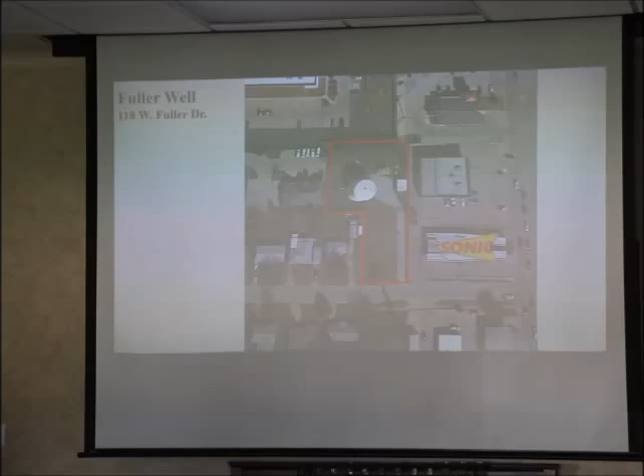Now it's interesting, we haven't heard it here because we're Trinity River Authority, but there's been a lot of articles in Arlington where people are complaining about taste and odor. It's seasonal algae blooms, and again it's not a health issue, just a taste and odor deal - it's water out of Lake Arlington. You'd say, well, we get our water out of Lake Arlington too from TRA, how come we're not having the same thing? TRA has got all this advanced treatment that y'all have seen through the plant. Arlington has that at one of their treatment plants, but not the other, and the one that has it is right now closed for a planned renovation, so they're running it through the other one. So this time of year there's been several newspaper articles about it, but even though we're getting from the same source, TRA is doing some additional treatment.

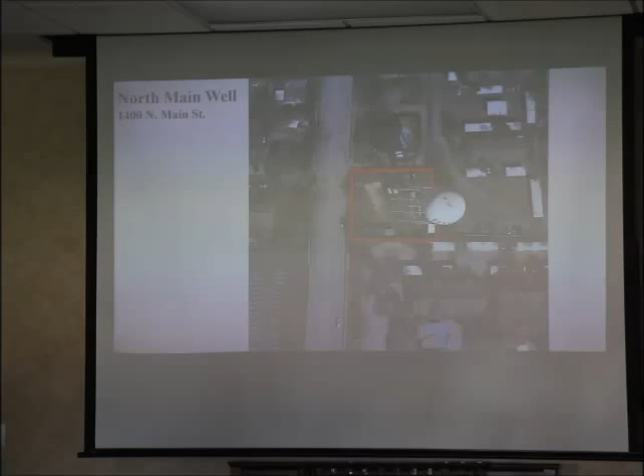Good to know. This next site is just the leg stand site where there's a well and a tower - this is the only site at the north main well. It's kind of obvious, if you can see the picture better it'd be more obvious, that it's just too small of a site to re-drill the well. Now the lucky part for us is that's our best well of the three wells that we have right now.

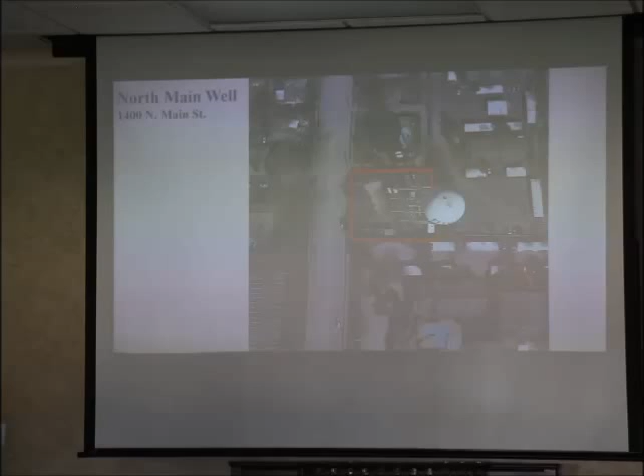It's the most consistent, it's the one that is just in the best shape. So we cannot re-drill it on that property, but it's still 50 plus years old. It's still past the end of life, but of the three, it's the best one.

And then this is that North Main, the far North Main ground storage site. Again, what the report has told us is it is a large enough piece of property to be able to re-drill the well and reuse most of the equipment that is already present there, including that ground storage tank.

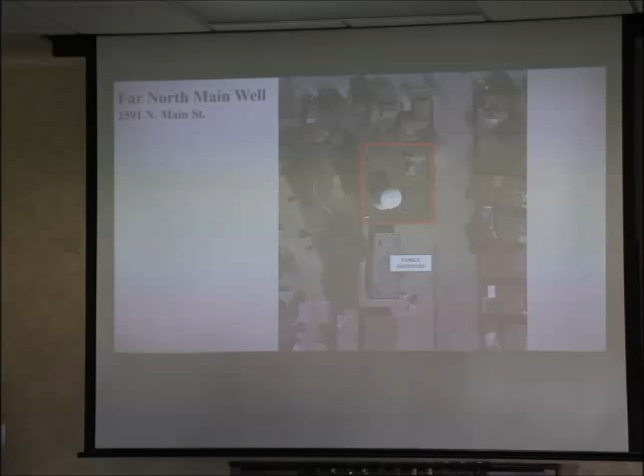This is that North Main water tower, 2 mil. This is the furthest north. What is that court, Bob?

That's Almond Court there, just to the right behind the picture. So Main Street and Cinnamon, the Nut Streets right there. Spice Street, sorry. Nut Streets. Gary Landers used to live in that area, so sometimes the association comes out.

There's no well at this site right now. However, I told you we could not re-drill a well at the leg tank. This would be probably the spot to, when we re-drill a well, move here.

We would have to do some additional testing, including a test well, before you sink the kind of money into a new municipal well. But there is room here to do a test well, and there's some operational efficiency where we can use that well then to fill that tank.

You've noticed at the other well sites, you've either got an elevated storage tank or ground storage tanks. It's part of the operation of the well. So it would be the logical spot to be able to re-drill that third well.

So what did the report tell us? The report told us that it's going to be about $3.5 to $4 million per well site. Wow. All in for a new well.

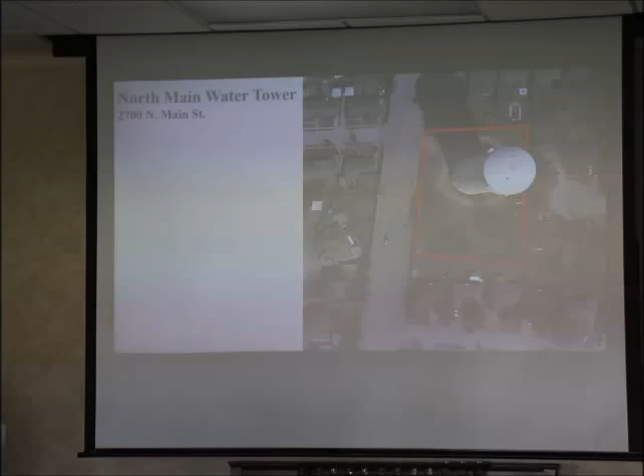Carbon steel is the typical material that is used in wells. It's fine, there's not a problem. Stainless steel is just a better material. It does not get as brittle over time.

The brittle casing can cause what we have now, where the upper aquifer leaks into the casing. If I showed you a down-the-shaft video of our wells, you'd see patches put into that existing casing over the years. It's a swaged patch, somewhat like patching a pair of jeans. The first one's okay, but when I was a kid I had patches on top of patches in my jeans, and at some point our wells are at that point - you just turn them into shorts.

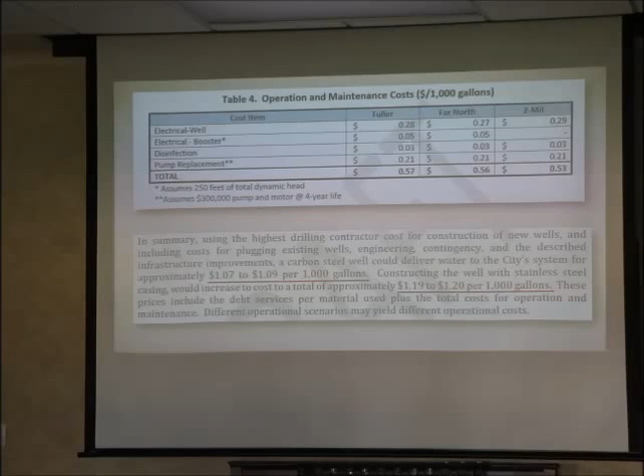This is how they're getting back to, as Loretta said, a comparison to a TRA number. If you look at the electrical, we've assumed - we know what the electrical is, we know our electric rate, at least for the next 5 years because we're locked in. Disinfection, pump replacement - you can see what they factored in there. It all comes down to between 57 and 53 cents per thousand.

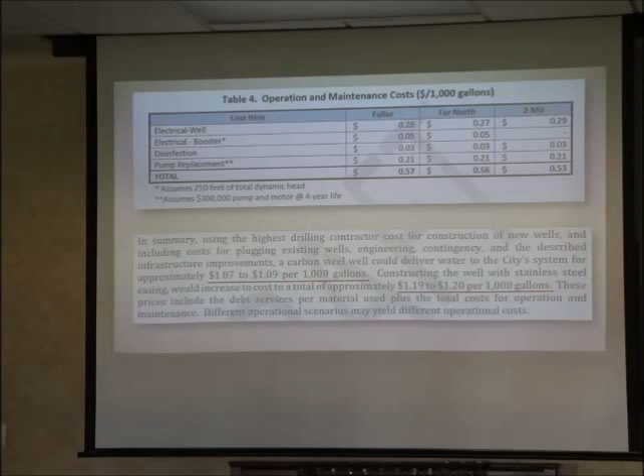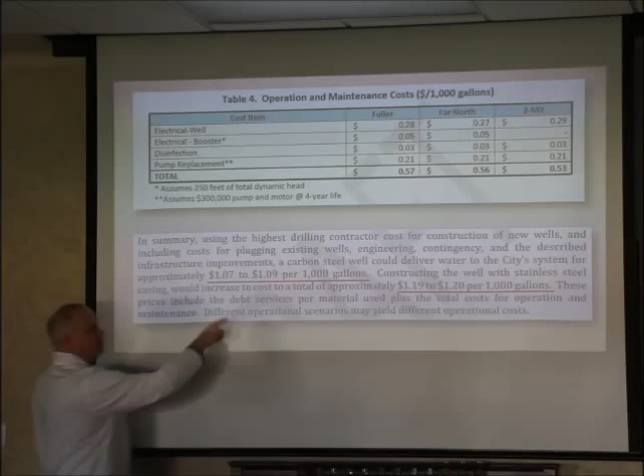So you add that together and get down to this statement: if we're talking carbon steel, $1.07 to $1.09 is the cost per 1,000 gallons, all in. If you go to stainless steel, it's $1.19 to $1.20.

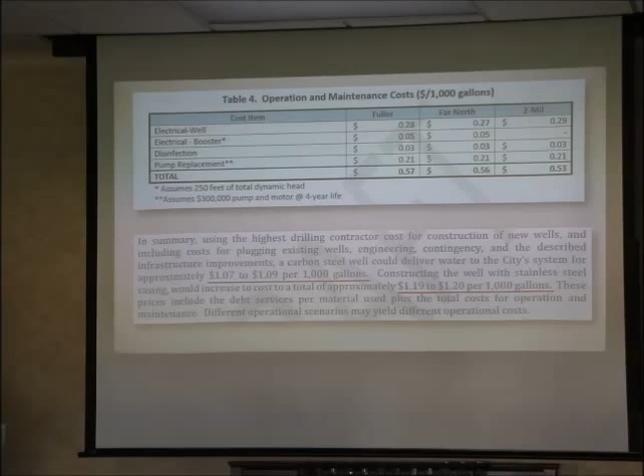The apples to apples comparison is our current rate from TRA, which is $3.27. We also know that our TRA rate is not going down in the foreseeable future. If you look at their projections, it goes up, the electrical cost to get water, raw water treatment. I would not ever tell you to bank on that number going down.

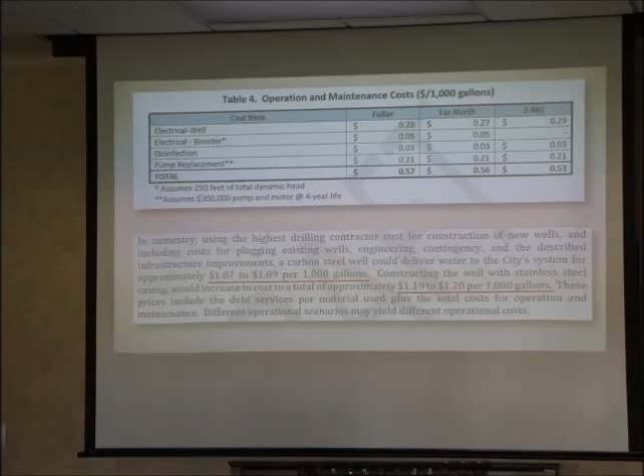So this was really the first decision point from the staff's perspective: do we stay in the well business? Should we just, when the wells die, plug them and go to TRA water? I would tell you we started into this process with some thinking that maybe we should just not have the wells.

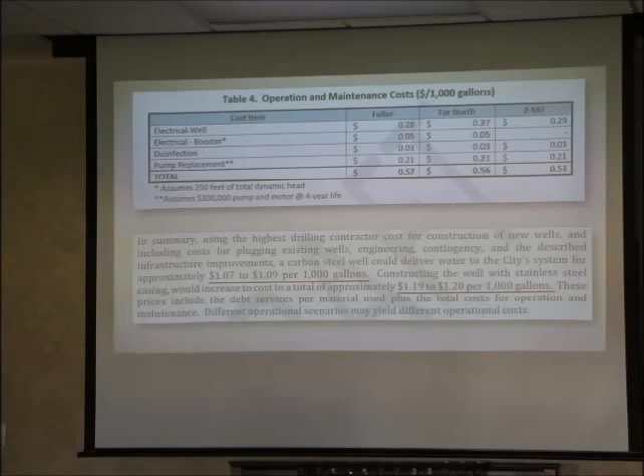But when you look at this, in an optimal situation we would be getting about 1 million gallons per day from each of the wells, Chris. So you've got the potential there. Now, with the wells being up and down the way they've been, we have not been at that optimal production for quite some time.

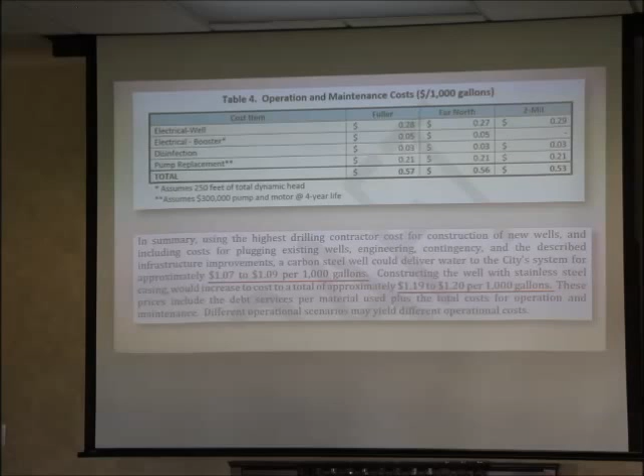So if you're not able to get that water from the well, you've got to go purchase it from TRA. When you do the math on that at $3.27 per 1,000 gallons, we quickly made the decision that the wells continue to make sense from a financial perspective. It's over $2 per 1,000 gallons in savings.

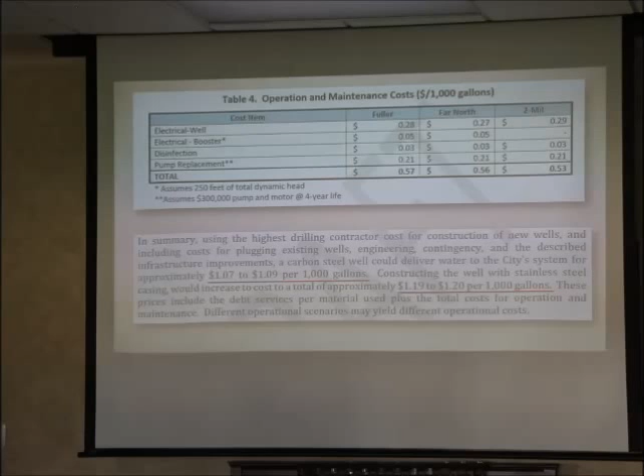And again, if they all quit tomorrow, we'd have to purchase that water at TRA's price. Right now when we do our budget, we count on getting water from the wells at a cheaper cost, and that's factored in. Obviously our customers are not paying separately for well water and TRA water, it's a blended rate. But we're able to keep our overall cost lower because there is some supplement from well water as well.

Well, that's 3 million gallons a day. Is that what you said, 3 million a day? That's optimal. What would that represent of our total consumption? It's a small part, right?

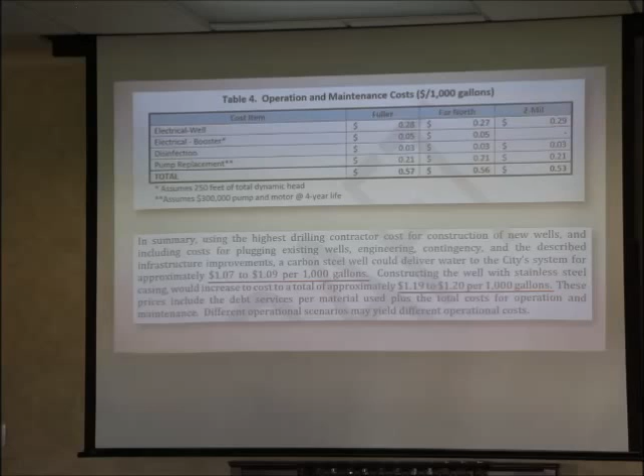We're not getting the 3 million right now. So the way I'd really answer that question is when I go back and look at a given calendar year, we are about 70% TRA, 30% well water.

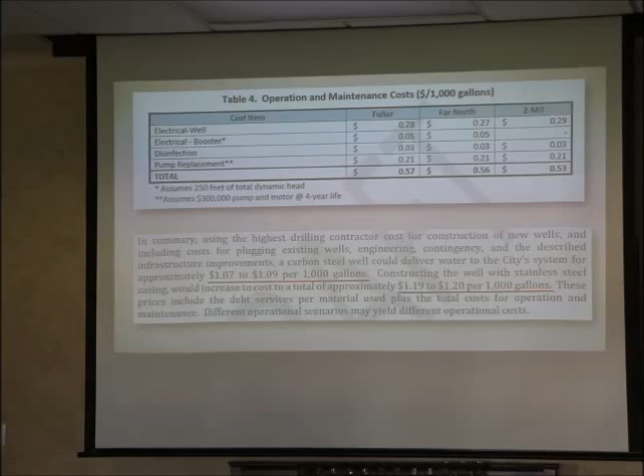This gets into the next part, and you kind of have to follow the train of thought here. We are a member of Trinity River Authority, along with 4 other cities. We have a contractual obligation with them. There is nowhere in that contract that says the city of Euless cannot produce more than X gallons or has to produce Y gallons. It's, I don't like the term gentleman's agreement, but when that cooperative was put together, we all, as individual cities, brought to the table a certain amount of existing water.

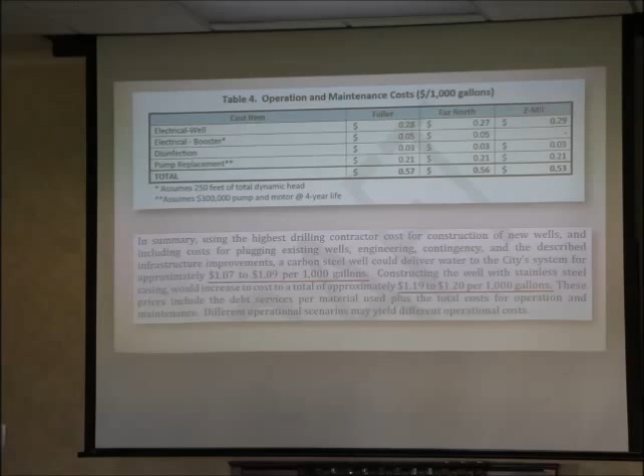And as a cooperative, we've added to TRA and grown the plant over time. So if I went out and drilled wells all over the place because it's a third of the cost of TRA water, the heck with TRA, let's just go do it, that would be to the absolute detriment of TRA and all of our neighboring sister TRA cities. I wouldn't want to do that to them. I don't want Colleyville, Bedford, or Grapevine to do that to us.

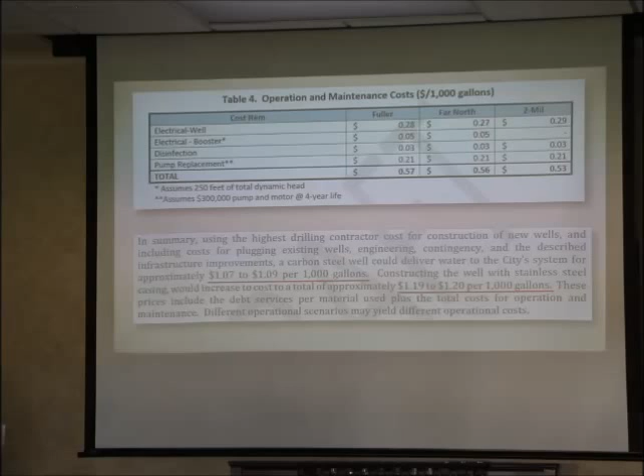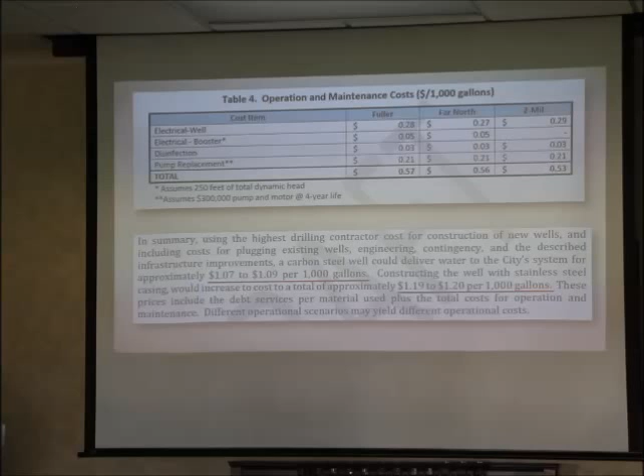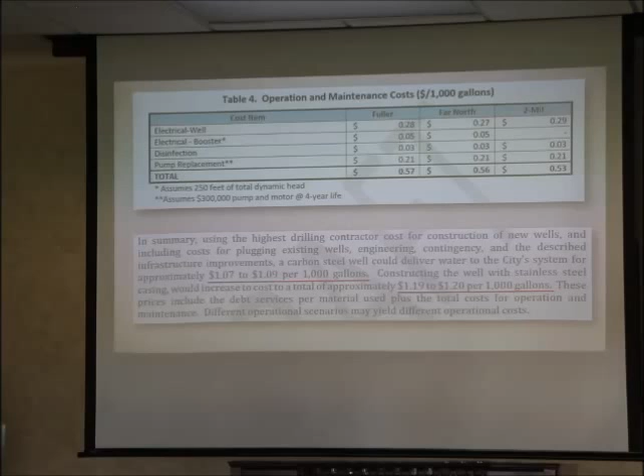So we all hold each other's hands, if you will. The way this is typically looked at is our 3 wells that we came to the table with, whether they're producing today or not is inconsequential. They were 1 MGD wells, so 3 million gallons, I look at it as our basket. To replace that 3 million gallons, or 3.5, or somewhere in that neighborhood, by drilling new wells, is absolutely fine and appropriate. But to go in and say let's drill enough wells to take care of 100% of our need, I think would cause us legal trouble, besides not being the right thing to do for the community.

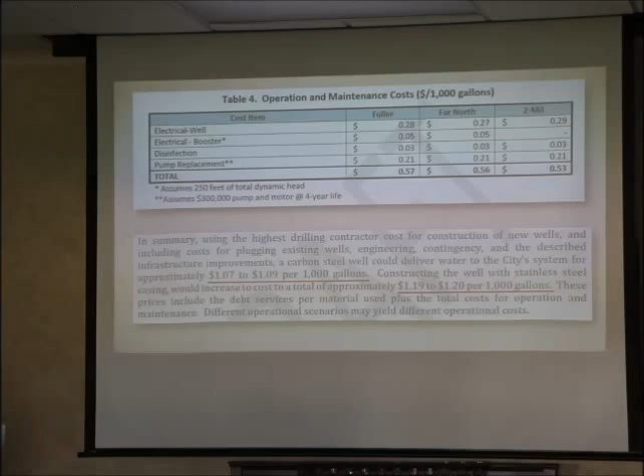So when we look at that, this gets into our recommendation. Obviously those other wells are old. We drill a new well, and the hydraulic study would show that by altering the size of the pumps, motors, and shafts, the long story short is I could get 3 million gallons a day out of 2 new wells, not out of 3 new wells.

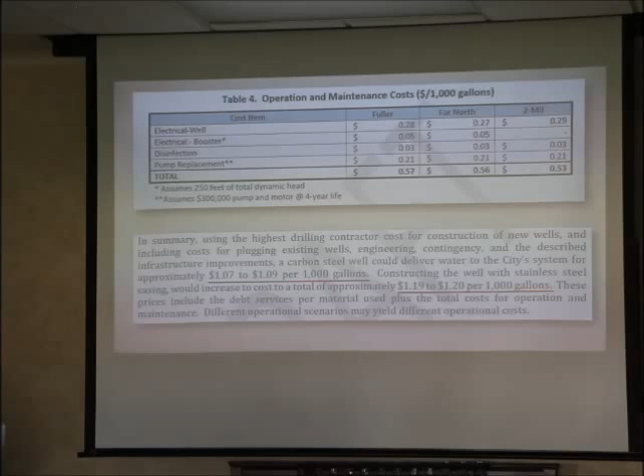So where we've landed as a staff at this point, and we seek a little direction from you, is we would not recommend re-drilling all 3 sites. We would recommend doing a project to re-drill 2 sites, that being Fuller and Far North.

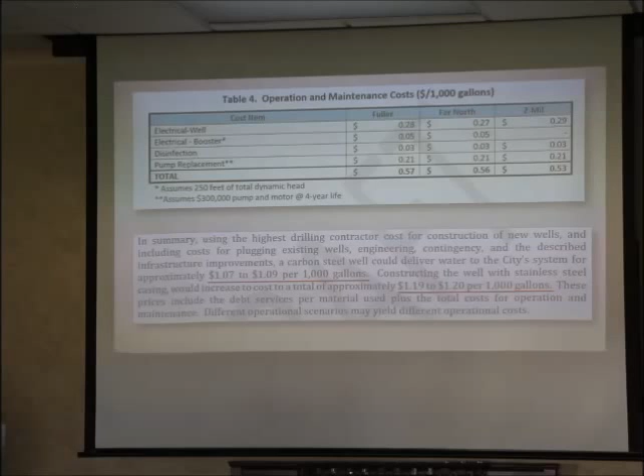We kind of see it as a single project, but you would drill these wells sequentially. So we'd start with Fuller, take it offline. We would leave Far North and the 2 Mill site up and running, and do everything for drilling and putting Fuller back online. When you turned it on, then you'd move over to Far North, take Far North offline. So we're never just completely offline.

What we would recommend is doing that at Fuller, doing it at Far North, and leaving the 2 Mill well site alone. I told you earlier it's the best of the 3 old ones, but it's also the one we can't re-drill at that site without causing us to move and do a test well, those type of things.

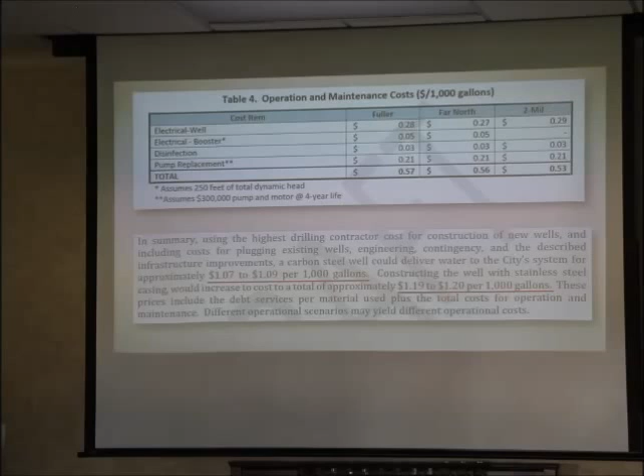So on one hand, if we go down to 2 wells that give us the same amount of gallonage we're kind of grandfathered to from 3 wells, from a gallon standpoint you feel pretty good. But maybe going back to your emergency operations plan, now you're relying on 2 spots instead of 3.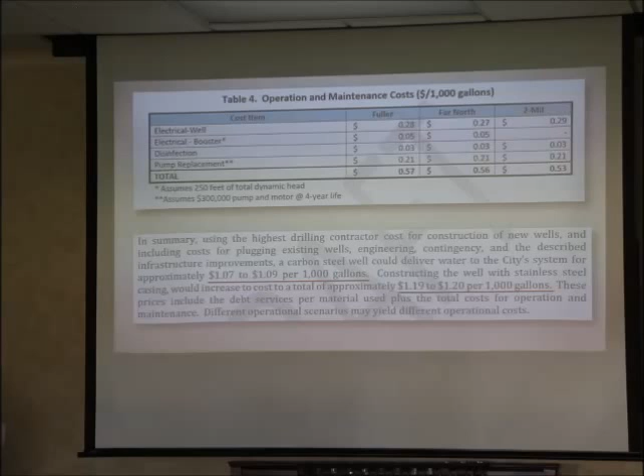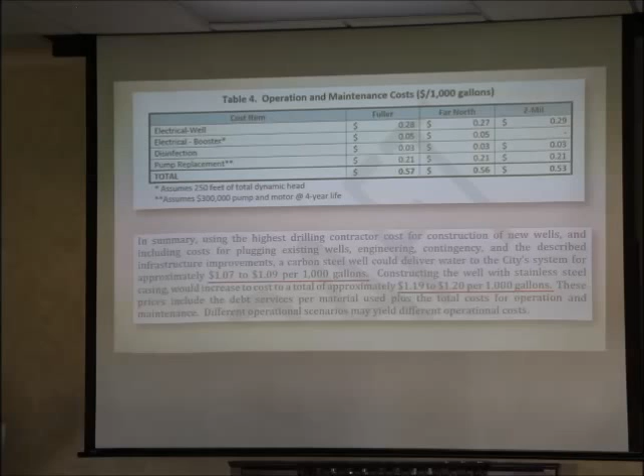I think what we're recommending is that we do these 2 new ones, and you'd be relying on those 2, but you'd leave that 1 mill old well up and running, and you'd run that sucker till it got like Fuller, where we're getting upper aquifer issues.

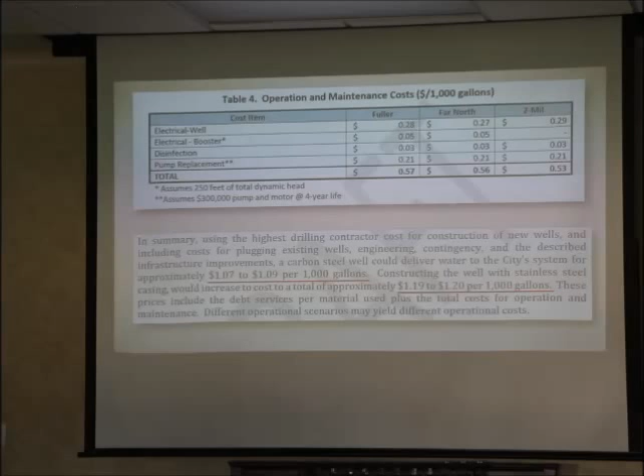Even if that meant you need to replace the pump in a couple of years or something, we would just run that until a point in time when it no longer made sense, and then we would pursue as a separate project moving up to the 2 million gallon elevated storage tank up north, doing a test well.

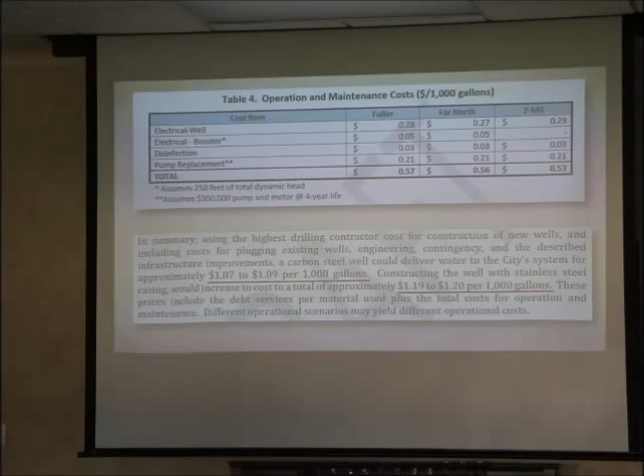So I guess what I'm saying is I would see, in a long-term horizon, always having 3 wells and still having 3 wells, but kind of 2 programs - a 2-well program now and a potential 3rd well program at some point in the future.

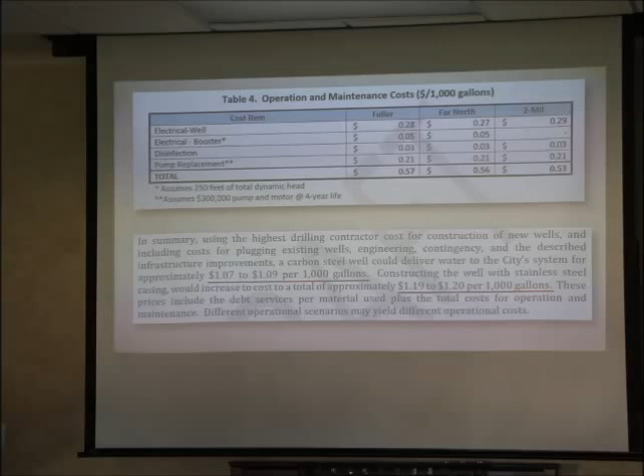Obviously, that's going to lower the cost. When we talk about $3.5 to $4 million a well, now we're talking about $7 or $8 million instead of $12, $13 million. So I think that's one thing.

I also want to step back real quick, and Loretta, if this doesn't come out right, you help me - when you get this $1.19, $1.20, that is your true apples to apples number to look at from buying water from TRA. Set that over here.

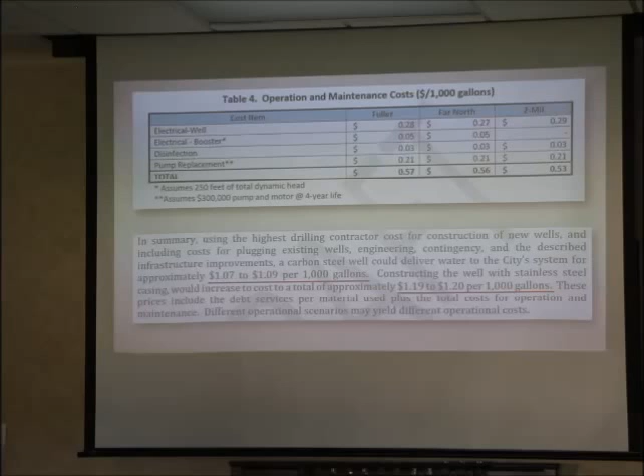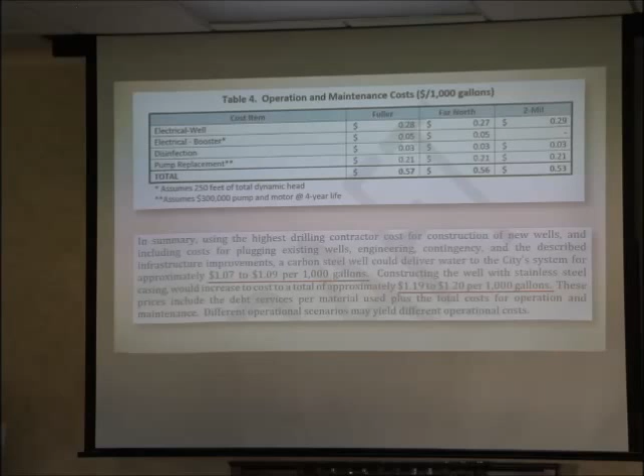On the other side, if we did this project, it's going to have an effect on our water rate, because we're going to potentially sell debt, and we'll have to pay for that debt, and the way you pay for the debt is through the rate. So the next obvious question is, okay, if you do this project, what is the effect on the existing rate?

We're going to tell you that number is approximately 30 cents, I think, on the existing rate. On one hand, I mean, again, you start to look at the $1.20 versus this, you might say, well, these numbers are more than 30 cents per thousand.

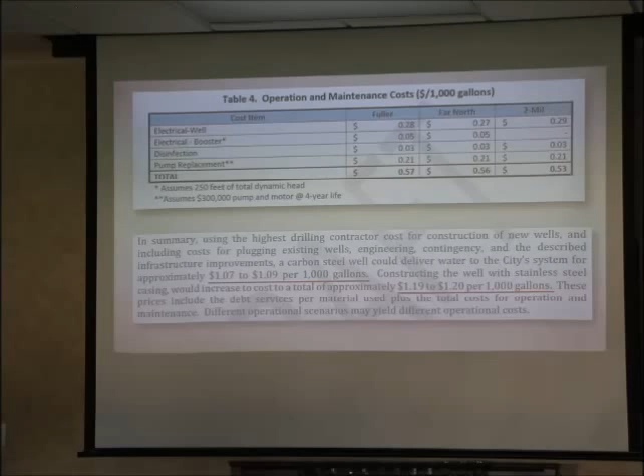How do you get that? When I'm talking 30 cents per thousand, remember, this is just the well water. 30 cents per thousand on the rate is our total usage, TRA and city. So that's why that number goes down.

And the operational cost for the most part is in our budget now. So really, then that's your apples to apples comparison.

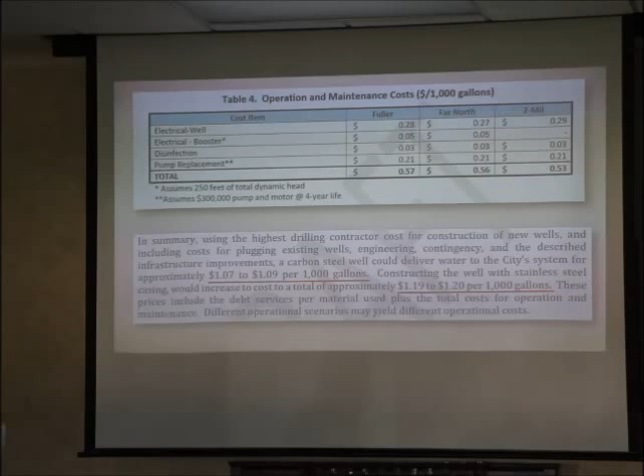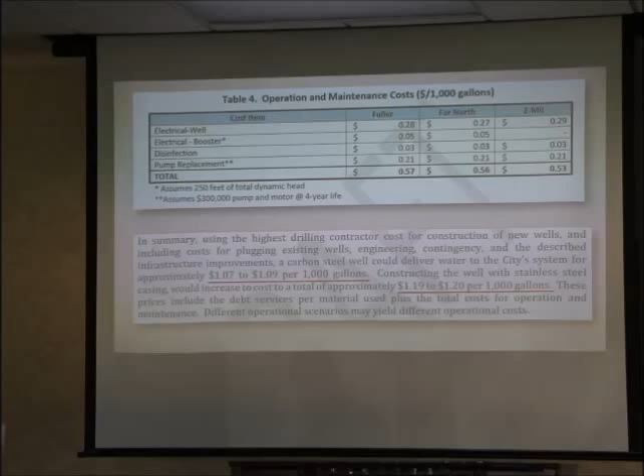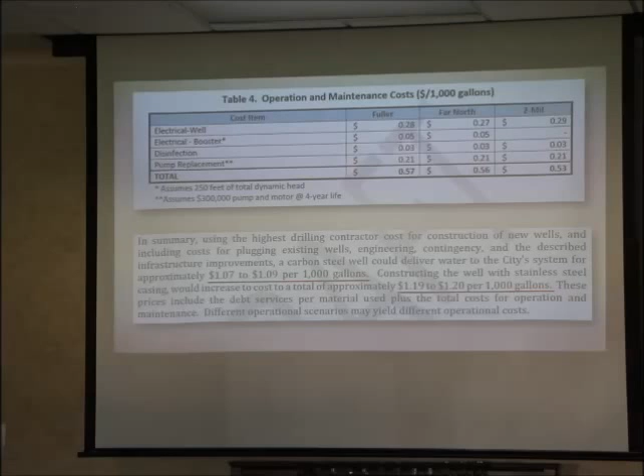So then we crank that into our total consumption citywide from all water usage. And if you did it all from a volume charge and none from a base rate, that's where I get to about your 30 cents per thousand.

Of course, you go back to the doing nothing piece. If you do nothing, you've got to crank something into your rates to pay for that $3.27 from TRA.

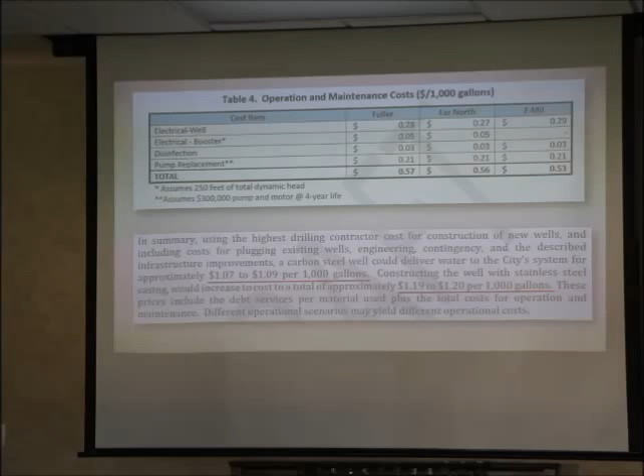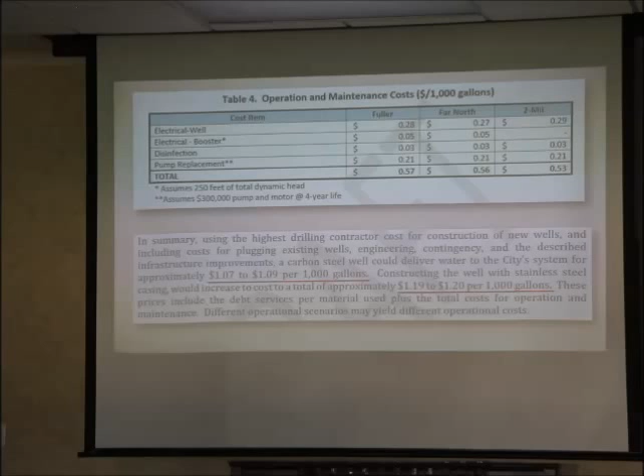So that's where I'm saying the direct impact. Now, you all would have a decision point as to whether or not you want to do a longer life debt. I think the whole point of us always trying to do a 20-year debt is you do not want to be paying debt on an asset that has ended its life before the debt's paid off. In this case, that could be something we would look at.

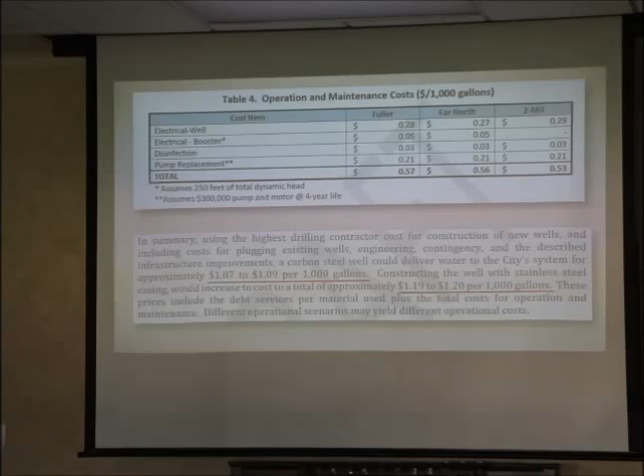We would want to explore two options here: Texas Water Development low interest financing, potentially even some grant money through that. That would absolutely be our first choice, which could even bring that cost down even more. But in the event that we did not qualify for that, then there would be revenue bonds.

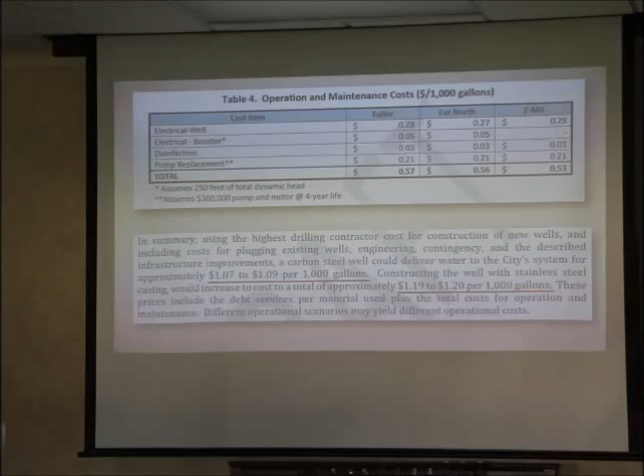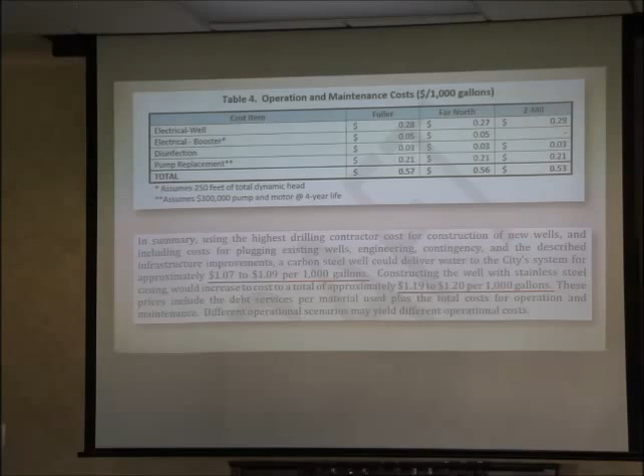All of the debt — our water and sewer fund has very little debt. The debt that it has right now is being paid for by the impact fee. That pays off in 2020, so we don't have any debt fall off. There's not a lot of debt in the water system, but this would be debt secured by the revenue of the water and sewer fund.

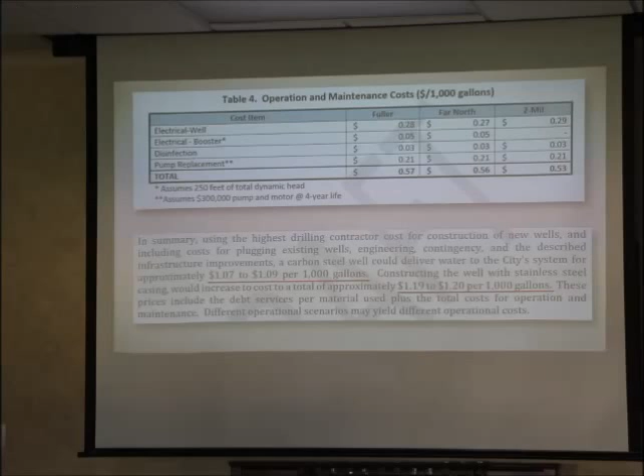And then you have to have a commitment in your rate to pay for that debt. So that is our best guess today, and then we would explore — he can walk you through the timelines of how we would need to apply for low interest financing from Texas Water Development Board — but our backup to that would always be the ability to issue revenue bonds secured by the rates if we were not successful in getting that funding.

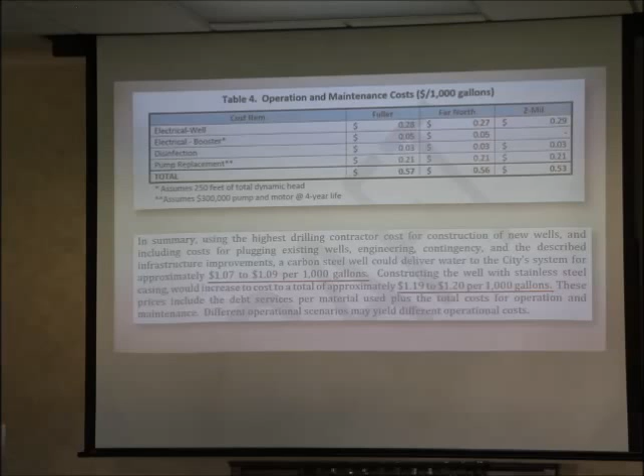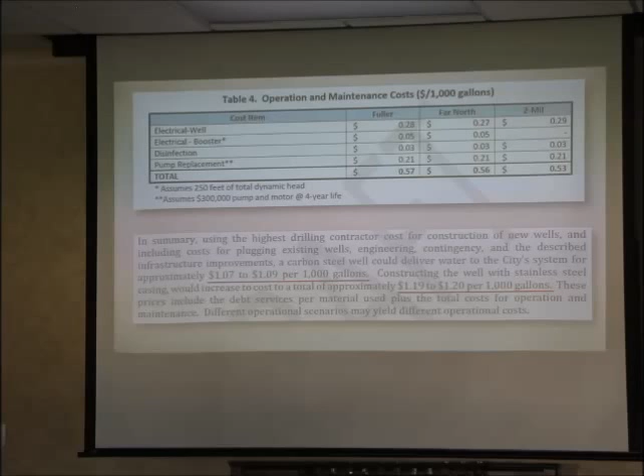There's two little tricky pieces to this as well. The wells are permitted through the TCEQ, so we've got to go to TCEQ and get authority, if you will. Now, we feel that's a pretty low hurdle because we are replacing existing wells, but you still got to go through the process, and sometimes that can be interesting.

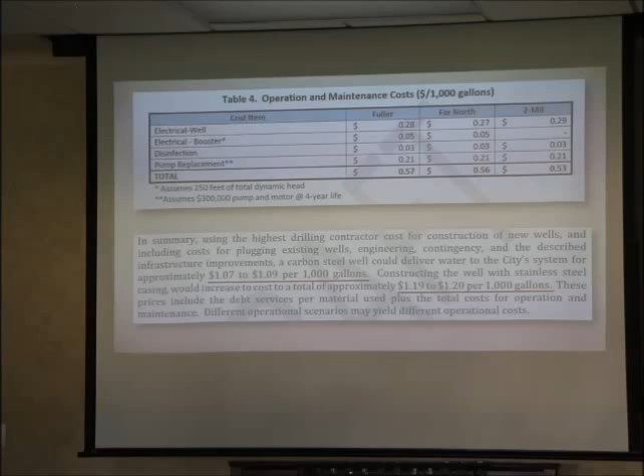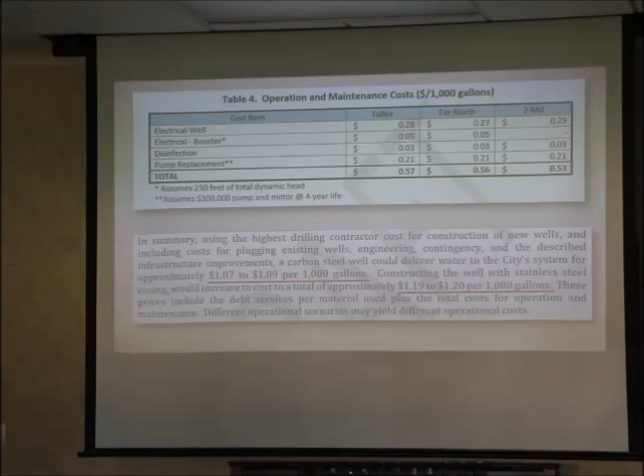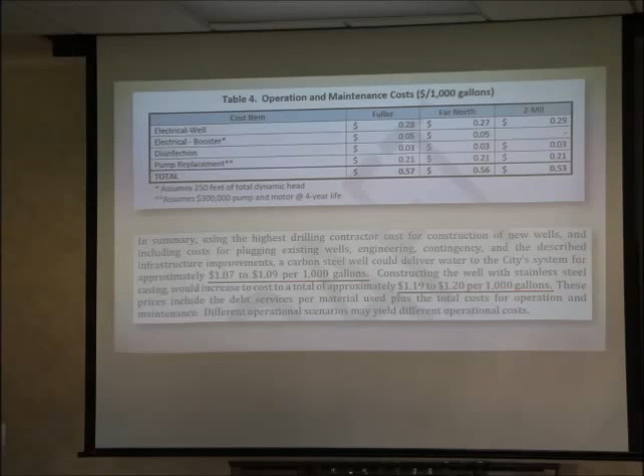They are also the ones that, on a local level, are authorized by the state to control well drilling and regulations and rules. They are currently operating under a set of temporary rules that it's pretty easy to pull out and read and understand how that would affect our project. They are working to adopt a set of permanent rules that, the best they will tell you, they hope to have adopted by 2018.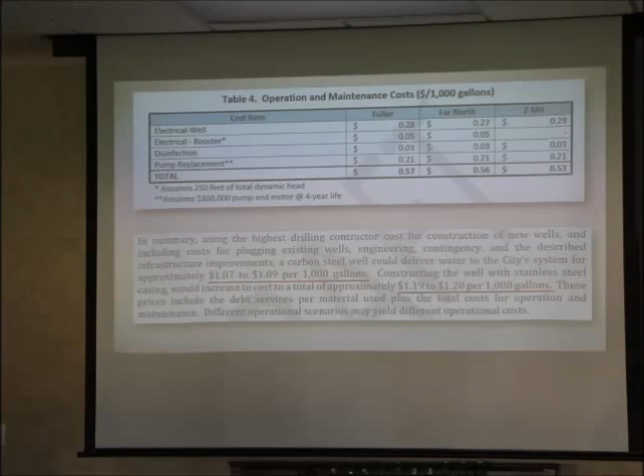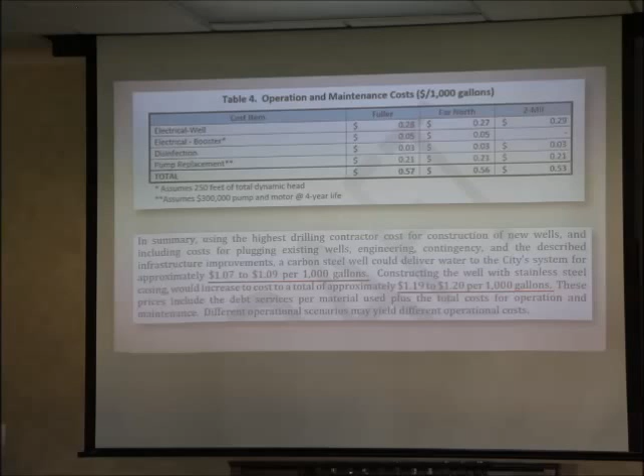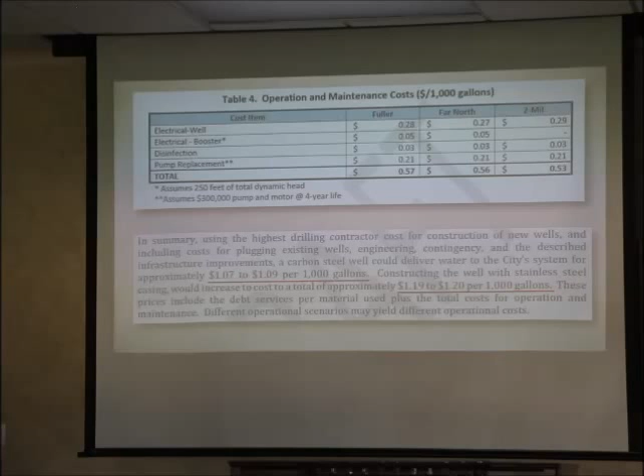And when we ask them, how do you see these rules differing from your current temporary rules, they say, we're not sure yet. So one thing we're going to have to do, no matter what — even if we decided to not do anything, just keep running on our existing wells, short of completely getting out of the well business — we're going to have to be really involved. We've been attending those meetings, but we're going to have to get really involved and be a stakeholder in that rulemaking process to fully understand it.

Are supplementing that, and it's good to have a backup source. But we cannot do it at the detriment of TRA, who is our primary supplier and will always be our primary supplier. Now, they will look at the case of our reclaimed water — they did not balk at that, because it allows, due to growth in the community, a delay in system expansion, which is very costly, so they did not balk at that.

Could we go to 3.5 million, or, if our pumps were working really well? If we determine that we need all 3 wells, but perhaps 1 million gallons per day is not the optimal amount, maybe 750,000 — I think we could do all of that, and I think there's a range in there. But I think you get to a point where you are hurting your other co-op cities, because we are not on a take or pay.

Some systems work on a take or pay — you say what you're going to take, and whether you take it or whether you don't, you pay for it. We're very fortunate with TRA that we don't have that. We each say at the beginning of the year what we expect to take from their system.

Euless has always been typically very close to that number. But if you miss that number, TRA sets their rate based on what we all commit to take. And if we miss that number significantly, or alter it significantly, they have a fixed amount of cost. There is a variable component to their rate, but they have a lot of fixed costs.

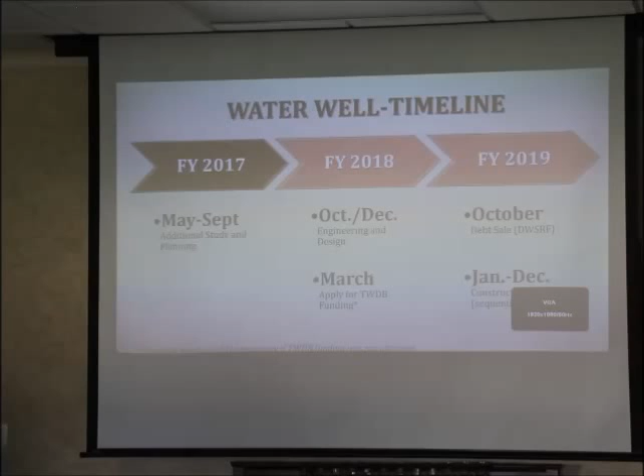Okay, well this will lead us right into our next discussion, which is reclaimed water, which we're moving right along with. Let's talk about that and the plan to try to finish it out.

I've got to tell you this one complete side note to the well deal, but I find it amazing. When we had these wells pulled recently, because we're working on the Fuller well right now and it's out of service, the guy who did the draft report said this is such a great opportunity, the well's out, we need to do a deflection test. You start drilling the well here on the ground, but 1,800 feet down, is it truly vertical, or how much did it move? That gets into where you can move your new well, because you don't want to drill into it. I guess I thought it just goes straight down - how hard can it be? And he said, no, you wouldn't believe how much deflection can occur.

He was giving me all these average ranges. When you think about when our wells were drilled in the 60s, with the technology changes back then, he said you just never know what you might find. He was completely blown away at the Fuller well - there's 14 feet of deflection in almost 2,000 feet of vertical depth. He said the guys who drilled this well did a really good job back then, so I just think that's interesting.

Low and slow, brother, low and slow. It's amazing. What's really neat is when they stick a tool down the top of that 16-inch shaft, 1,800 feet down to the bottom, looking at a TV screen, trying to put a patch on. Yeah, it's like, wow, that's amazing.

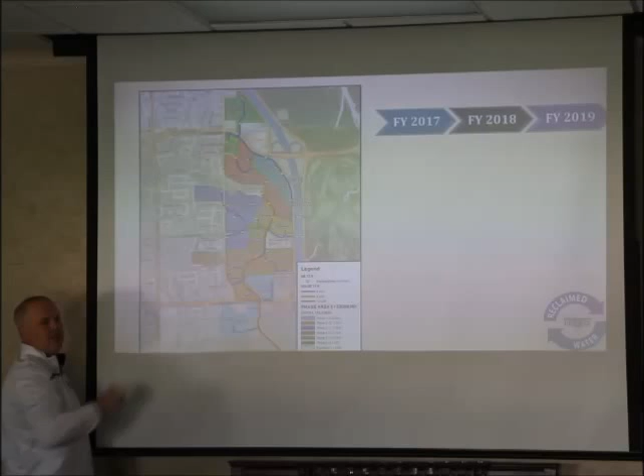What we have completed recently is basically phase 1, 2, and 3 of this project - all of the stuff here in blue, generally all the stuff in yellow, and the purple. What we did not do is Tall Timbers Apartments, because it simply did not financially pencil out to run the line that additional distance for the use they had. Doesn't mean it'll never be there, it just didn't make financial sense as part of the project. Same with Fountain Park HOA. This last piece picked up Village Green, but we didn't do that extra piece yet because financially right now it doesn't pencil out. Doesn't mean we're not going to come back and do that.

So what is in your current CIP book are phases 4, 5, and 6, layered in there over multiple years, with a price of $4.3 million to do phases 4, 5, and 6.

Phase 3, which we just completed, was borrowed from the Water Development Board and came in under budget when all said and done. We got what they call a green fund, but I call it a grant. It's loan forgiveness, where you borrow X and they forgive a portion of it right off the top.

We visited with the Water Development Board since the bonds are already sold and asked if we could use the remaining unused funds for the next phase of the project. They said not only can you do that, we'd like you to, since we've already gone through all the bond sales. So we need to design the next phase.

In fact, what we believe now is that we could roll phases 4, 5, and 6 into a single phase, completing the original 6-phase project with one more phase done all at once.

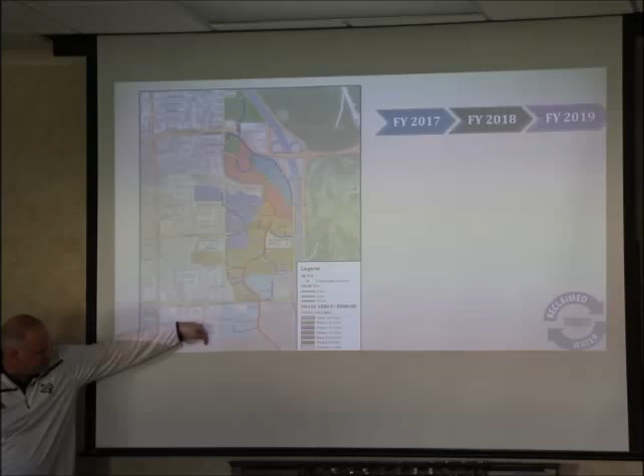They would also take a look, from an engineering standpoint, at a change we made in this area, where we extended this line to this point and brought it down to this point. There's been a plan to extend this line all the way over to Midway Park, do our Blessing Branch piece, and also tee off right here to hit the school district property.

I don't know, the other night at EDC, I don't know what Steve's going to talk about, but he said they'd be coming to tell the city before long about some school expansion plans. Obviously they own that piece of property — I don't know if he's talking about that one, but someday that's also a right property for it. So they would finish up the study, if you will, for all of that.

I believe everything I just talked about can get done for about $3.9 million, as opposed to the $4.3 million currently in the CIP. I also think that number might be closer to about $3.1 or $3.2 million, because we'll be able to deduct from that $3.9 million the remaining unused funds from phase 3. So net, you're talking about $3.1 to $3.2 million.

So our plan would be, if you agreed to, by March, in a couple days we have to turn in that project information to the Water Development Board, which would again consider inviting us to apply for a water development loan. They've verbally indicated they'd really like to fund projects like this one, since it's been good, it's on budget, successful, and has a green component. This is a continuation of it, so I think we'd hopefully be successful.

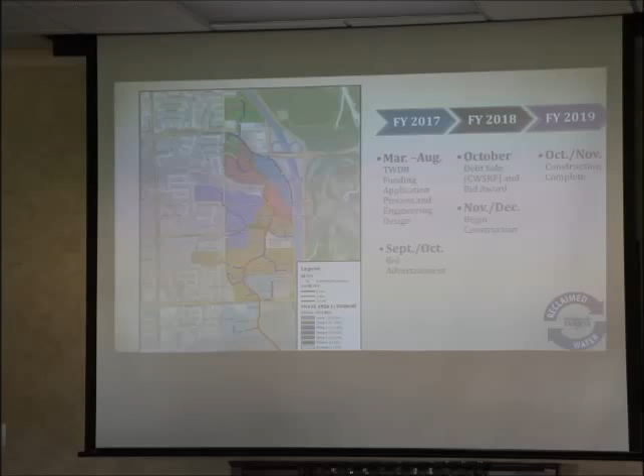So Janina will simply do the math on the debt sale and determine what that cost is. But when we calculate what we're purchasing, the water that goes to these users will be purchased at $1.55 rather than $3.27. And the savings will pay for the debt.

I hate to put it in those terms, because what we do is look at all of our debt costs and all of our expenses, debt costs being one component of that. We look at how much water we're going to sell system-wide, and we blend those - how much we're purchasing from TRA, how much from our wells, how much from reclaimed water - and come up with a blended cost of the water, and then give our citizens a blended rate.

So everyone benefits from the lower cost of well water and reclaimed water. Reclaimed water is typically about 15% less; we do pass on a little bit of that savings to the customer, but they pay about 15% less in general than the potable water customer. So there's still some benefit going to the potable water customers from that.

I hate to say it will result in a net wash because there is $3 million worth of debt here that we have to factor into the rate. I did the math on the straight $3 million the other day - if you don't count out any savings from purchasing from TRA, that would be about 15 cents per 1,000 gallons. But there is some savings from not having to buy that from TRA.

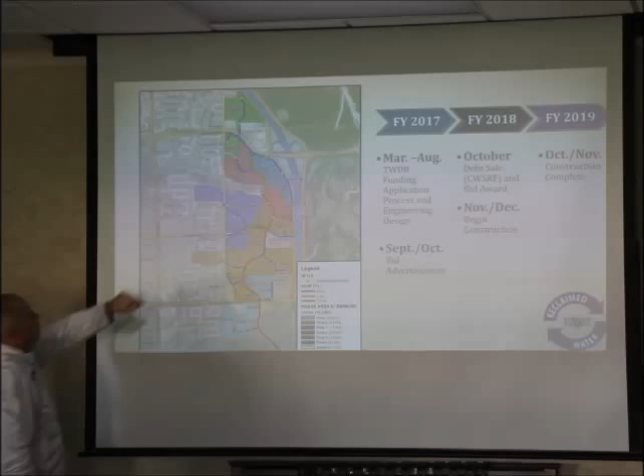How about for city properties? So yes, and what we have right now is up in this pink area - basically the amphitheater and dog park area - that's where it terminated, and we've converted our irrigation in those areas. Now, I don't want you to think it's the whole park, it's the part that we could reach from right there.

And then talking about this system, there are also the median irrigations along Bear Creek and even Mid-Cities and some of those that are irrigated. And of course, we're using the reclaimed water at Parks of Texas Star Softball World facility. But for this part of the system, there are some city uses.

This map doesn't show it because we didn't think we'd be able to, but Brookside HOA - we actually were able to hook up, and they've got some pretty extensive HOA common areas that were hooked up.

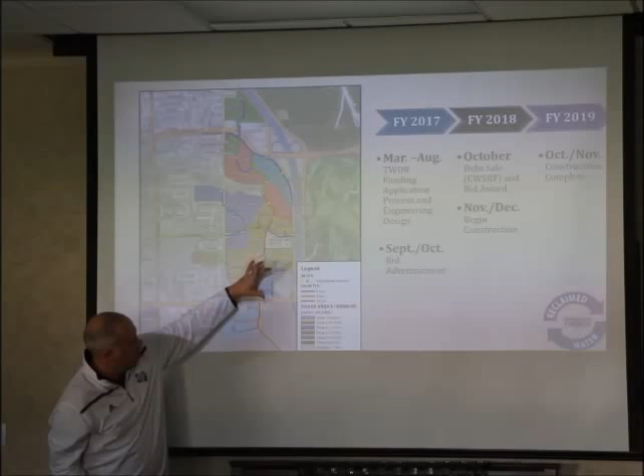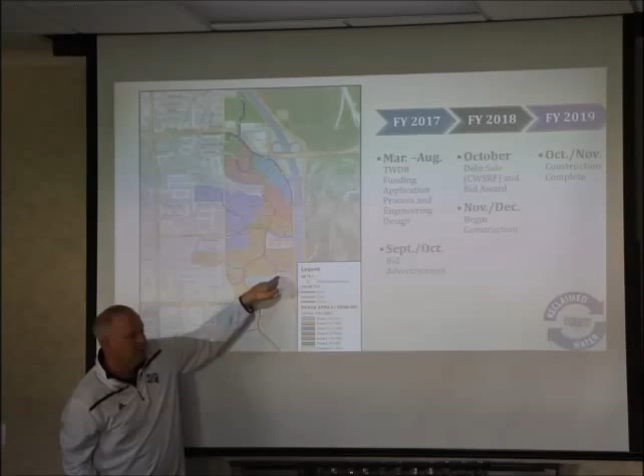This is Riverwalk, a separate ownership - that hard corner that, I don't know, Loretta, it seems like we're talking to somebody all the time about development there. As part of bringing the line over to this piece, we brought reclaimed water to those three pieces, so they're teed up to be ready to use, but there will be more of a commercial element.

Is that the intention of going down the Blessing Branch Creek to make it to Midway Park? That is the intention - to make it to Midway Park and be able to irrigate all that. And as you know, in the CIP plan, there's a project where someday Blessing Branch would turn into more of a trail linking Riverwalk and that area of town over to the rec center, but allowing you to irrigate all that as well.

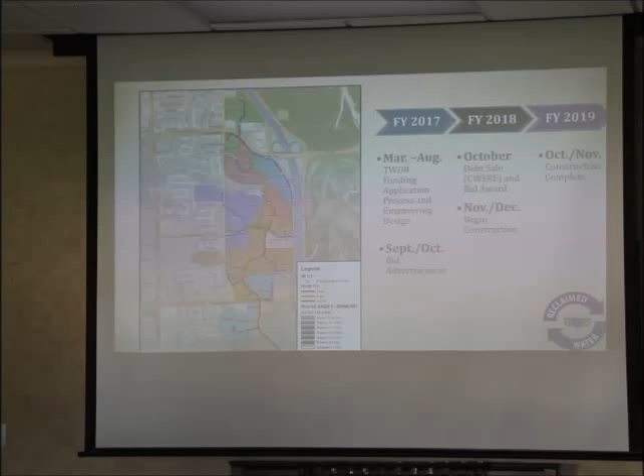So as we move forward and we're able to get this system looped back to the west and get to Glade Parks and possibly get to other users on the west of us, are we 10 years out in planning for something like that? Good question.

I think we've got to pause a bit. Yeah, I think we would pause. This was the original plan - well, I guess the original plan was Texas Star and the Parks at Texas Star. And then we had the ability to do this side of town, and there was a lot of low-hanging fruit, because you had a lot of apartment complexes, heavy irrigation use, and some pretty straight paths to those.

We will absolutely have to, at the conclusion of this project, stop and reassess whether or not it financially makes sense. One thing that may make sense is as the airport starts to develop more of their property on the other side of 360, there may be some connection opportunities there if they were to get some large uses on that side.

When you start trying to make those runs all the way to Glade Parks, or try to get back to the other side of town, we're going to have to determine whether that will ever make economic sense. It may not, because you can't pick up individual residences unless you have very large users, and you're talking about some really long runs - that may not make sense.

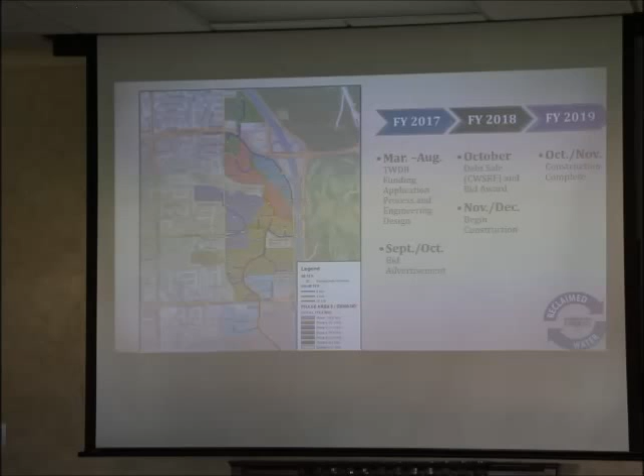The good part is we've got parkland that goes all the way east-west across the city, right? So there's no cost there from acquisition of land. You could run it through the parkland, you could pick up the park irrigation - exactly. The very expensive, bad part is that pond.